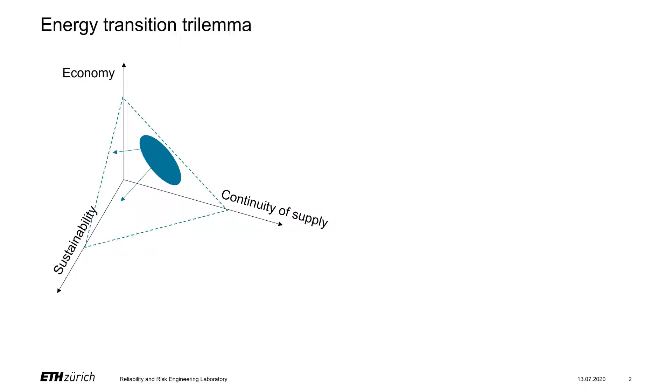In most of the developed world, our energy systems are fairly cost-effective and reliable, but we need to drive towards sustainability. We investigate this trilemma of the energy transition in active distribution networks and microgrids. Active distribution networks are electricity distribution networks, including renewable generators such as PV panels, storage, or controllable distributed generators.

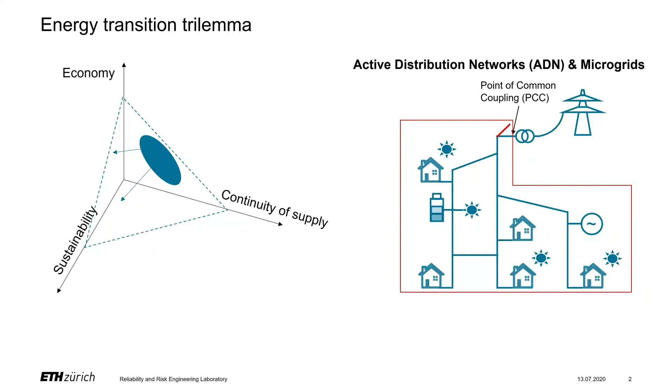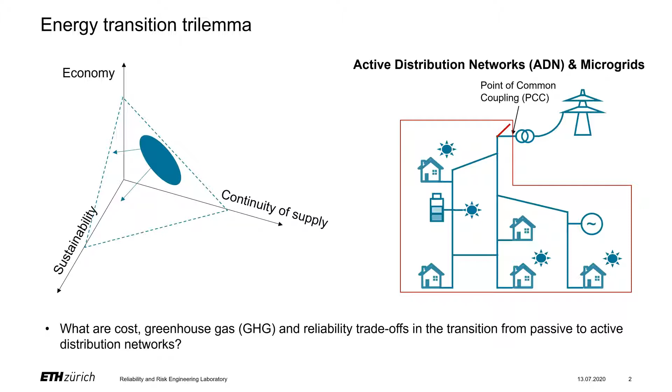A particular form of an active distribution network is a microgrid, which we define as an active distribution network which can operate in islanded mode by disconnecting at the point of common coupling. Our research question is: what are the cost, greenhouse gas emission, and reliability trade-offs in the transition from passive to active distribution networks? To answer this research question, we use a mathematical optimization model.

For a given grid with characteristics such as the topology, line parameters, and electricity demands, for a set of candidate technologies with known greenhouse gas intensities and prices, we cast a multi-objective mixed integer linear program to optimize the installed capacities, technology dispatch, grid imports and exports, and the binary variable for a transition from an active distribution network to a microgrid. More on that later.

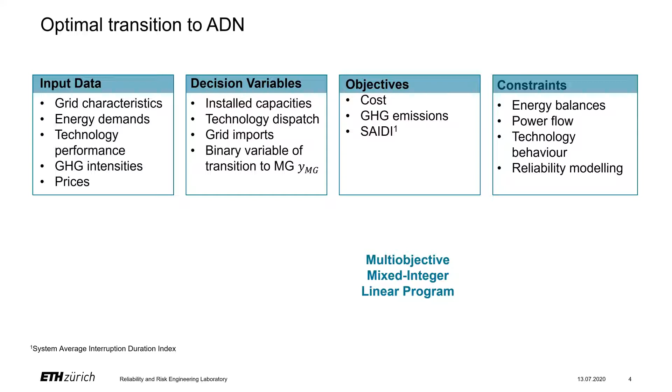We try to minimize three objectives: first, the cost; second, the greenhouse gas emissions; and third, the SAIDI, which is the system average interruption duration index and quantifies the expected duration of grid outages for each customer. The constraints are mainly energy balances, a power flow model, modeling of the technology behavior, and reliability. The resulting multi-objective mixed integer linear program is solved with an epsilon constraint, column and constraint generation solution. More on that later as well.

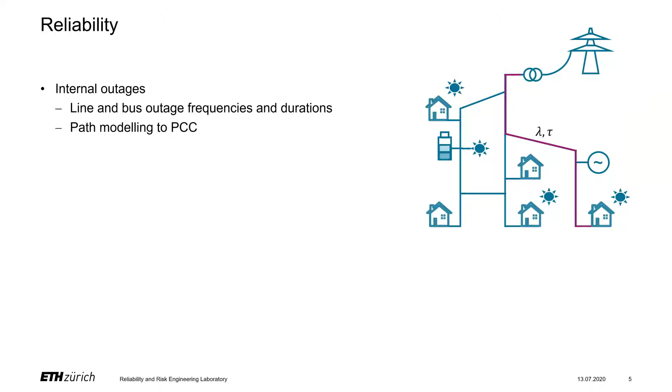Now I would like to focus on the reliability model, as this is the most innovative part of our research. In terms of reliability, we model two kinds of outages. The first kind is internal, so line and bus failures, where our lines and buses are characterized by a failure rate lambda and by a repair time tau. For a particular node, for instance, the one at the bottom right, we need to model the path between the node and the point of common coupling to find the buses and lines which contribute towards the outage frequency and duration at this particular node.

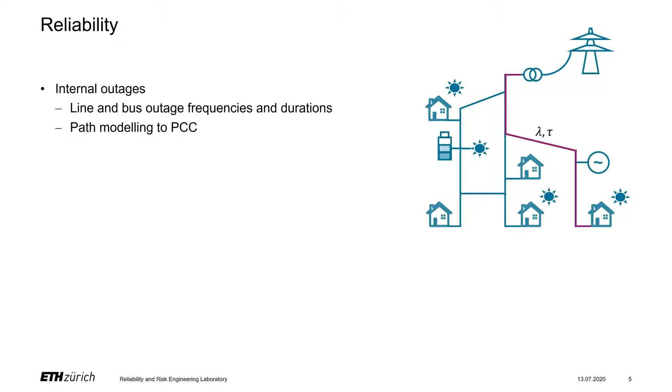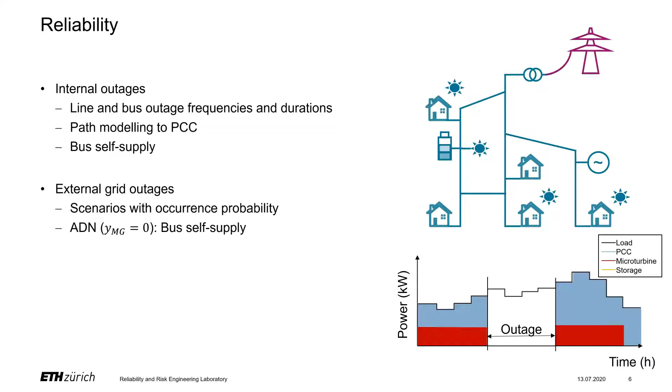The second kind of outage happens in the external grid. There we model different scenarios. So for each time step, there is the probability that an external outage happens, as indicated below. If we are in the active distribution network case, meaning that our binary variable indicating that we transition to microgrids is 0, then we have the same situation as above. It's still self-supply for buses with distributed energy resources.

If the microgrid has been built, we allow islanded operation, which means that we can supply the local loads with local generation and storage, and the grid is energized. Still, some loads may be interrupted because we can prioritize high priority loads. For successful islanding, there are two conditions.

The first and obvious one is that the microgrid is built. And the second one is that there is sufficient fast ramping power to avoid a blackout when we do the transition. The storage and other generators installed in the microgrid have to be able to pick up the power import at the time step before the islanding transition within times of an order of magnitude of 1 second.

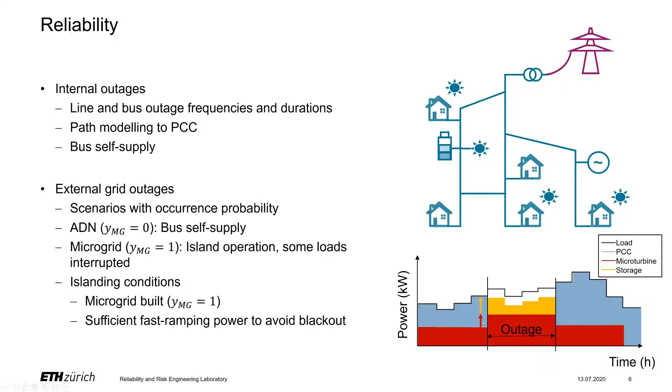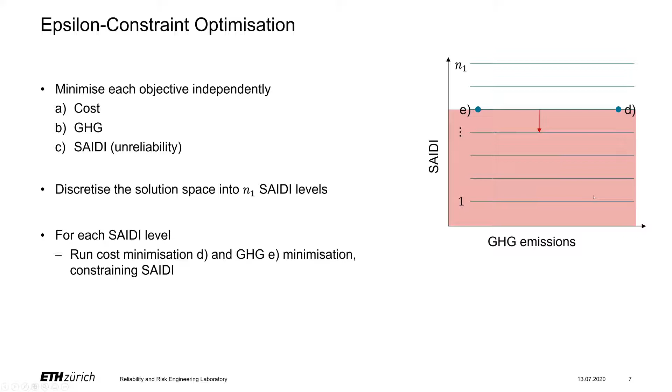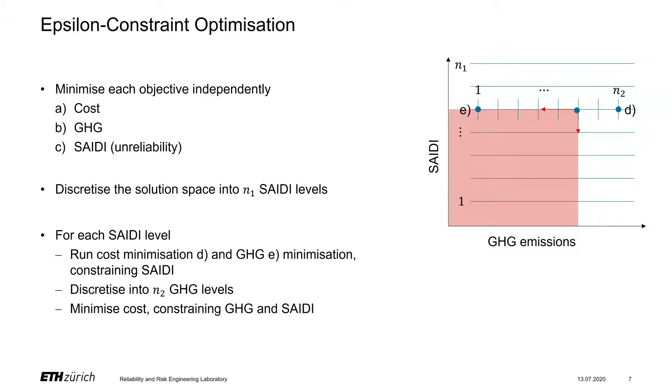As a second step, we discretize the solution space into N1 SAIDI levels, and for each level, we run again a cost and greenhouse gas minimization, which results in the points D and E respectively, while we constrain the SAIDI to be below this level. As a next step, we discretize the space in terms of greenhouse gas emissions, and finally run optimizations constraining both SAIDI and greenhouse gas emissions, which typically yields a point in this corner, as this is the minimum cost solution for a given SAIDI and greenhouse gas emission constraint. And this way, we explore the entire solution space of 3 objectives.

The developed model and solution method is applied to a distribution network in California. As we don't have the topology of a real grid, we take the benchmark topology of the IEEE 123 bus system, but the reliability values and other values are specific to California. Particularly, the failure rates and expected durations of external grid outages, line and bus failures are tuned to published data from the California Public Utilities Commission.

In terms of candidate technology, there are 3 options. First, a lithium-ion battery. Second, a microturbine fueled by gas.

And third, photovoltaic panels as a renewable generator. They are modeled here with affine cost functions, meaning that there's a constant, a fixed cost, and a capacity-dependent linear cost. For the point of common coupling, there is also a cost for the peak capacity that we consume, which is intended to incentivize peak shaving.

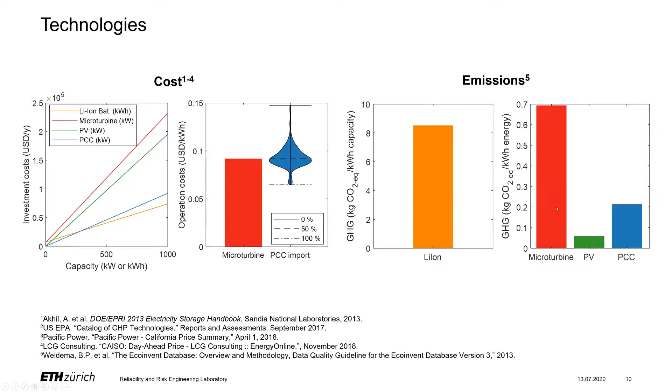In terms of greenhouse gas emissions, we consider both embodied emissions and energy-related ones. On the left, you can see the embodied emissions for the lithium-ion battery per kilowatt hour of capacity, whereas on the right, for the microturbine, grid electricity, and PV, we consider energy-related greenhouse gas emissions. In California, the grid mix is relatively clean, thus the emissions are lower than compared to the natural gas-based microturbine.

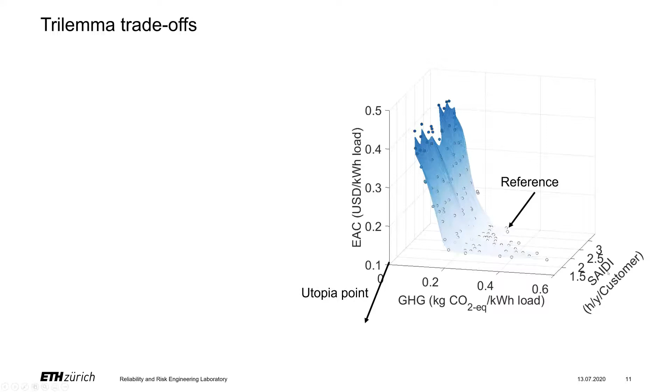Starting from the reference solution, we can see that there are a variety of paths to reliable grids. One can go with a rather low cost and high emission path, or when one wants to reduce the greenhouse gas emissions significantly and improve reliability, costs increase. By the almost vertical ISO cost curves, one can see that greenhouse gas targets drive costs more than reliability when going significantly below the current reference level.

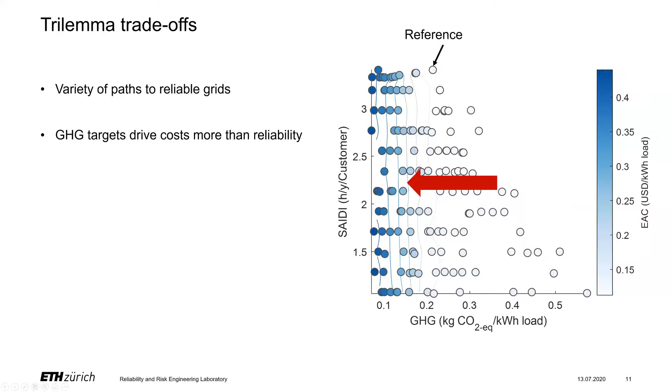In terms of SAIDI solutions, when reducing the SAIDI, the solutions are rather stratified, meaning that the cost-optimal solutions are always at the SAIDI limit. Whereas for greenhouse gas emissions, we have significant gaps in the solution, which highlights the importance of exploring the search space, because even though we constrain the greenhouse gas limit to be within this red arrow, the next cost-optimal solution actually has much lower greenhouse gas emissions.

The point of common coupling is slightly undersized, meaning that the capacity is below 1 kilowatt per kilowatt peak of load when we have a microturbine, which can also help with peak shaving. But when we move towards lower greenhouse gas emission and higher SAIDI solution, where we only have PV, which is exported in times of PV excess, the point of common coupling connection is slightly oversized compared to the load.

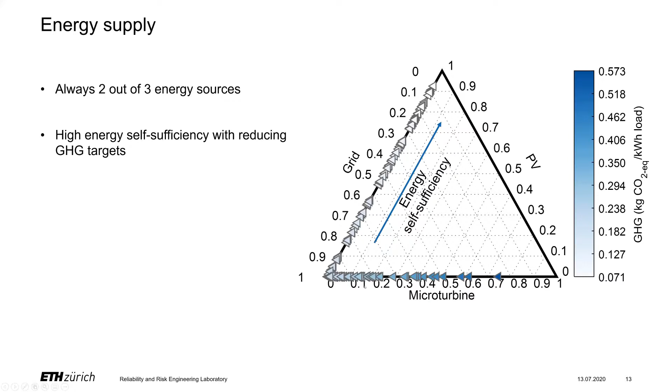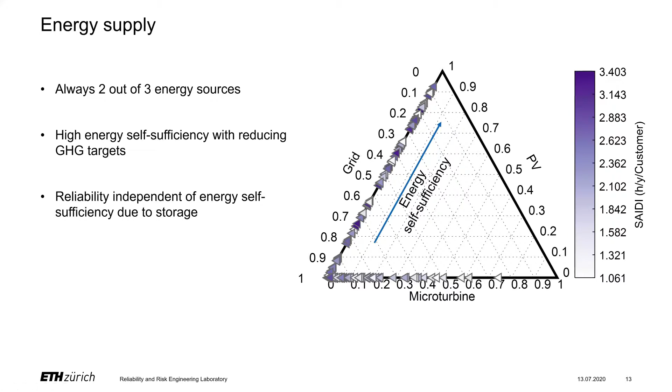On this axis, we also see an increase in energy self-sufficiency because both microturbine and grid electricity are imported, while the PV energy is locally produced. Finally, the reliability is independent of the energy self-sufficiency, as we can see that with the SAIDI on the color code, we see all colors on this line, which is mainly due to storage, as one can install storage to improve the reliability.

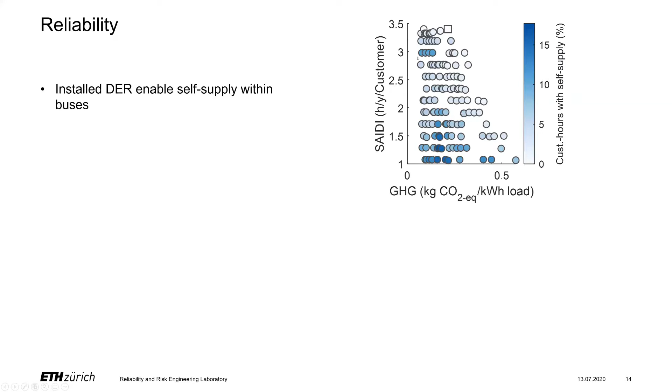In terms of reliability, we can see on this plot the bus self-supply in terms of the percentage of customers' hours where nodes can supply themselves. With decreasing SAIDI, the ability to self-supply increases, but there is also this pocket of high self-supply at about 3 hours per customer per year. This can be explained due to the transition to microgrids. For higher SAIDI values, it's sufficient to install a few distributed energy resources for nodal self-supply in key nodes, but as we move below 3 hours per year, a microgrid is built.

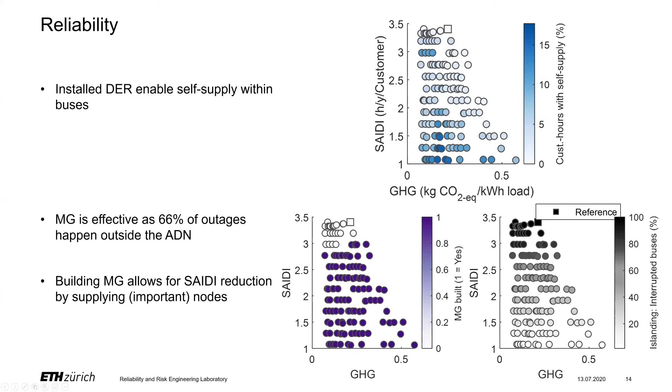Finally, I would like to conclude with the main trade-offs that we found in the energy transition trilemma for active distribution networks. First, a significant reduction in greenhouse gas emissions increases costs, but also energy self-sufficiency. For most of the greenhouse gas emission levels, the reliability can be improved at similar costs. And finally, within the trilemma, there are clear trends in the optimal technology mix and in the decision to go from an active distribution network to an islanding microgrid.